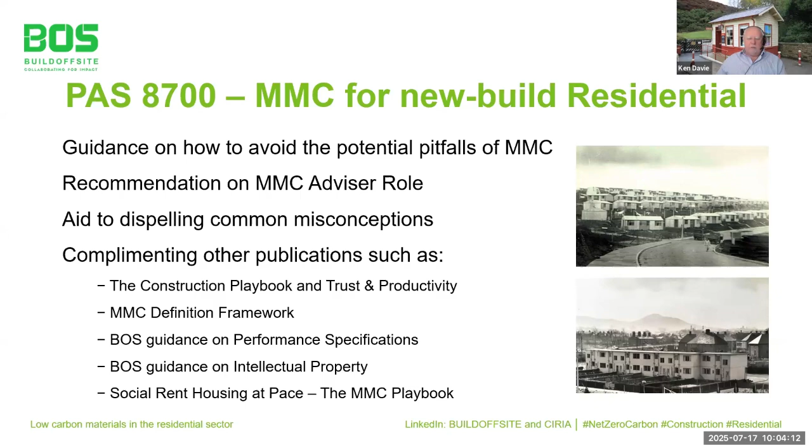And just a couple of little images to remind people that MMC, although it says modern methods of construction, both of these images actually relate to post-war. And when I say post-war, it's World War I, not World War II. One of the technical authors will be speaking at Offsite Expo in September about PAS. And at this point, I've said enough, and I'd like to hand over to our chair for the session, Dr. Kat Ibbotson. Thank you, Ken, and hello, everybody.

Welcome to this webinar. So what brings us here together today? This webinar series has been developed in collaboration with Build Offsite and CIRIA's Driving Net Zero Community of Practice to discover how the increased adoption of low carbon materials could support greener practices in the construction sector. We've done a fair few webinars so far which focus on low carbon and construction, all aimed to help the UK achieve net zero carbon emissions by 2050.

Now, the UK plans to deliver 1.5 million homes over the next 5 years as part of its mission to get Britain building again. Herein lies the opportunity, but also the risk, in terms of the opportunity to reduce carbon embedded in building homes at scale using low carbon materials. This webinar will explore how specifying cross-laminated timber, recycled steel, and low carbon concrete could pave the way as we move forward. Now, I'd like to introduce our speakers.

We have Patrick Usborne, the architect and founding director of Architects Perpendicular. We have Gwilym Still, director, Passive House and partner at Max Fordham. We have Steve Chesters, business unit director at Hadley Frame. We have Matthew Belcher, founder and CEO at Hempspan. Rory Bergin, partner, Sustainable Futures, HTA Architects. And joining our panel is Orlando Gibbons, who will be moderating for us, a senior engineer and embodied carbon specialist at Arup.

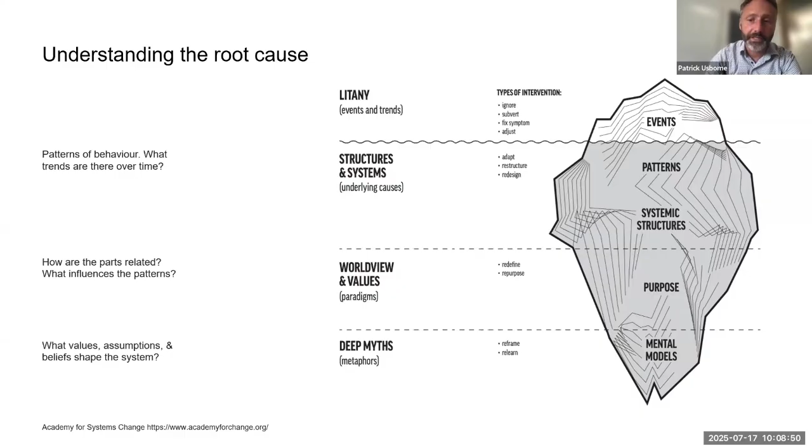To achieve lasting success, we need to go much deeper and reframe the mental beliefs which support the entire system above, to achieve a more holistic, sustainable, and inclusive design approach - shifting our economy to enable a systemic change.

One big thing is the need to shift the economies, which are very complex. It includes how we evaluate, how we educate, but also it starts with challenging how we define progress and its current measure, gross domestic product.

The third diagram is a graphic developed by an American planning consultant called Bill Reed, which really instigated the whole movement on regenerative design. Regenerative is a term used probably too often over the last couple of years, but it's actually very specific.

When we aim for sustainability from a systemic perspective, we're trying to strengthen the whole system for both people and planet, where we work in harmony to collectively regenerate ourselves and the environment around us.

Sustainability is first and foremost about systemic health in the environment and resilience at different scales, from local to regional to global. So it's moving beyond net carbon zero to get to a regenerative mindset, where we're all in unison together.

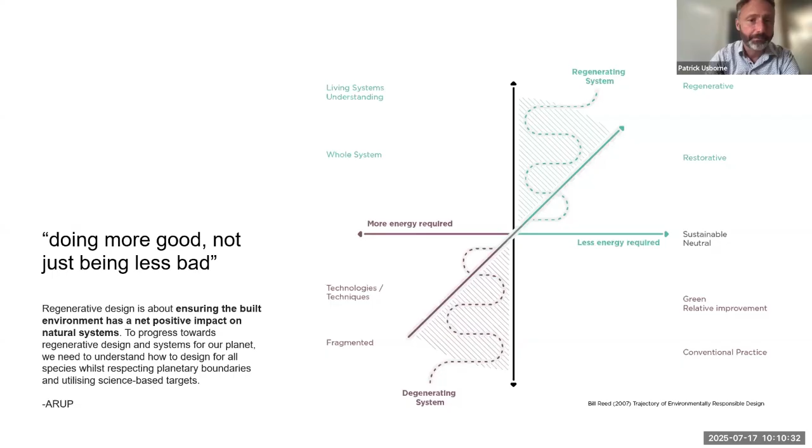In the manufactured cycle, products and materials are kept in circulation through processing like reuse, repair, and remanufacturing - so it's the way in which we build homes. Whereas the biological one is what we build with. Both are equally important.

I want to talk about two research projects we've been involved with. The first is a research competition called the Climate Smart Cities Challenge, which happened a couple of years ago, where Bristol was one of four cities which put themselves forward. It's a UN Habitat-backed competition.

We entered the competition through the Positive Collective, which is a collective we've set up, and we became finalists. We worked with others to try and combat a really big challenge Bristol has: to develop 24,000 new affordable homes by 2050.

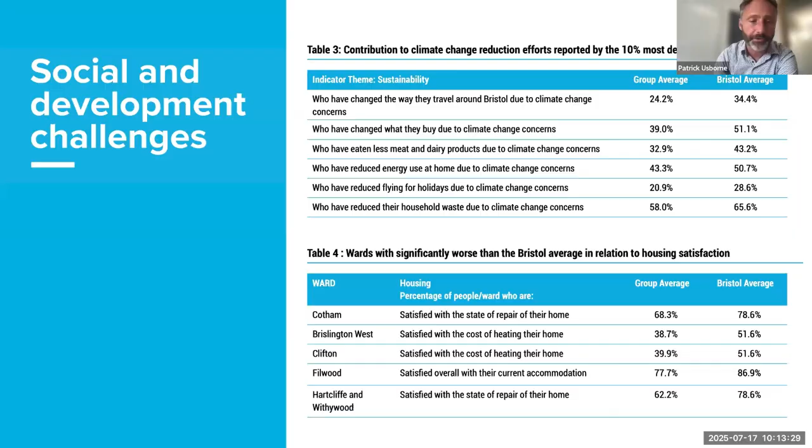So this research project was about how can we bring these people, these communities, and actually provide them agency, not just to create affordable homes, but also to bring them on board and help them to contribute to a more sustainable future, which is another world which we feel is possible.

So we created a platform which was called the Civic Exchange. We worked with various organizations: Igloo Regeneration, which was focusing on finance, Bristol Community Land Trust, We Can Make, and ourselves at the Positive Collective.

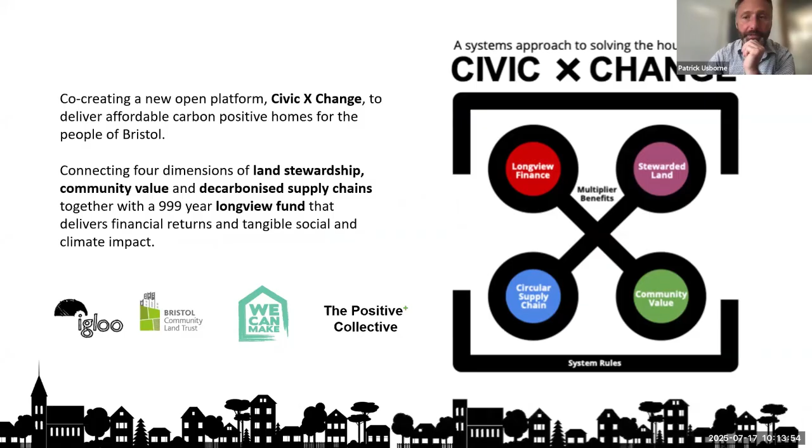And what we came up with was a 4-pronged approach for the Civic Exchange. One is to have stewarded land, focusing on and allocating mainly smaller urban infill sites held by the city, the church, or the NHS, on a long 125-year lease to encourage long-view stewardship and social value returns.

The second is community value, so looking at insetting rather than offsetting. Making sure that the value stays within the community, and the community living there can actually have agency and be part of the financial contributions of the profit.

This goes to the third one, which is long view finance. So bringing a blended green finance model in, having pension funds and other providers, but also those people living there can buy into the fund rather than buying their individual house.

And then lastly, a decarbonised supply chain. So for example, we...

We focused on a small area of Bristol, and what the Civic Exchange allows is to map all of the houses which are both needing to be retrofitted and providing support through the council to enable that to happen, but also all of the houses which could be better fitted.

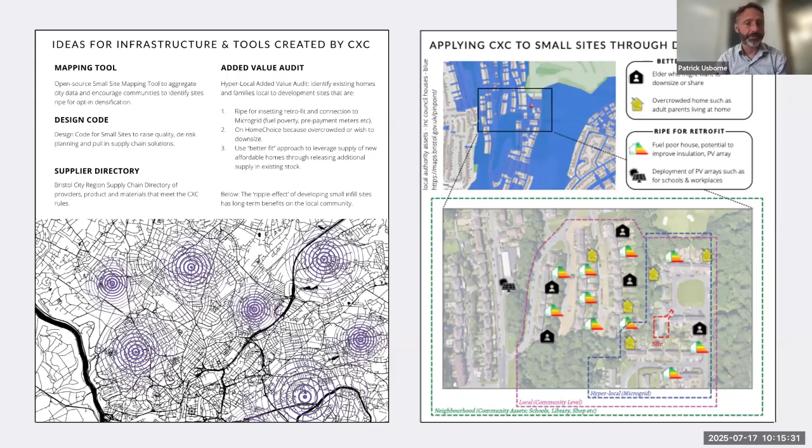And that's where residents might be bursting at the seams and need a bigger house, and where the next door neighbour might be rattling around in their house and need a smaller house. So locally trying to swap people around on a very localised level to achieve a better fit.

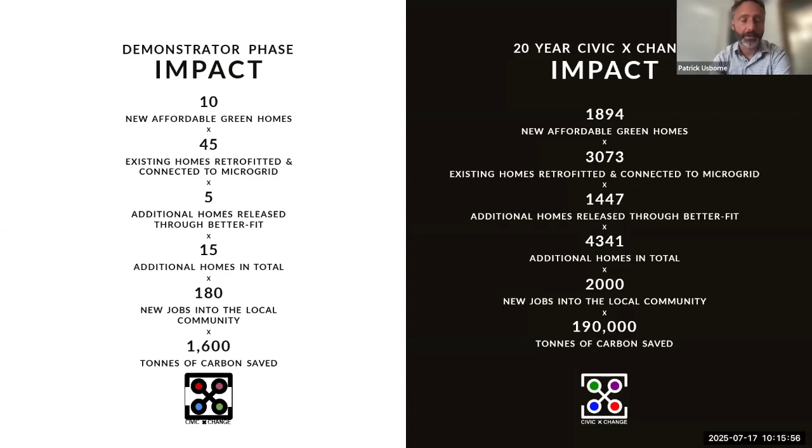This was a demonstrator project, and we felt the multiplier was quite significant, because if you're both retrofitting to be more sustainable and also better fitting, that deals with the vast majority of the housing needs in its own right. And then identifying all of the local pockets of land to build sustainable homes in.

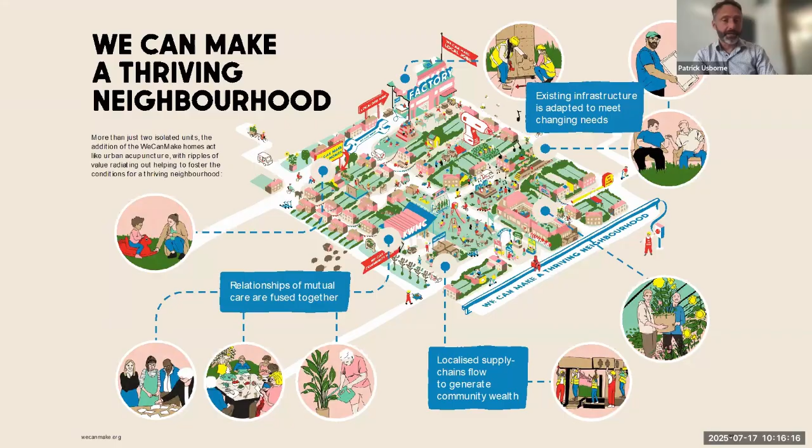So this was all about working with the local community. We Can Make has been doing this at the moment, and they've set up a workshop called the Knowle West Media Centre. I've got a video which I'll start to play, just a short amount, to explain how it works.

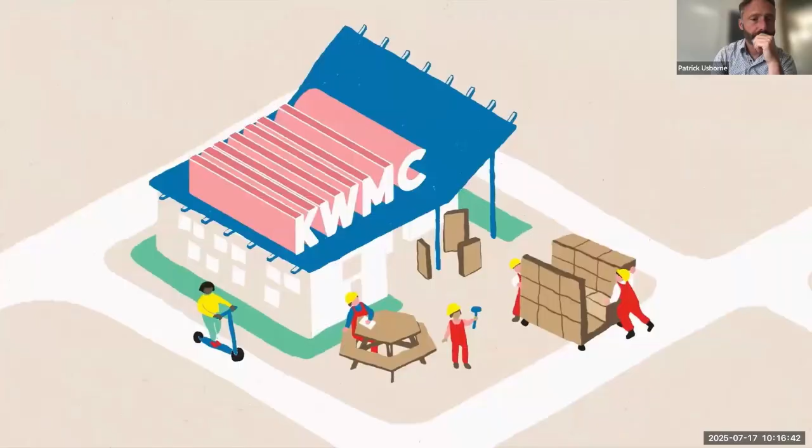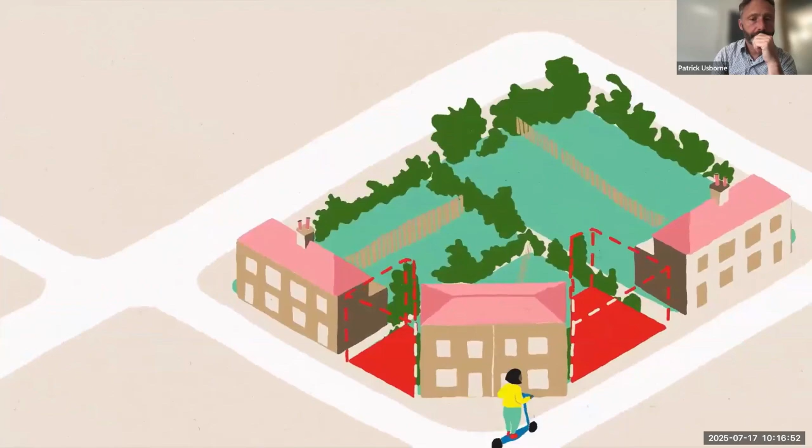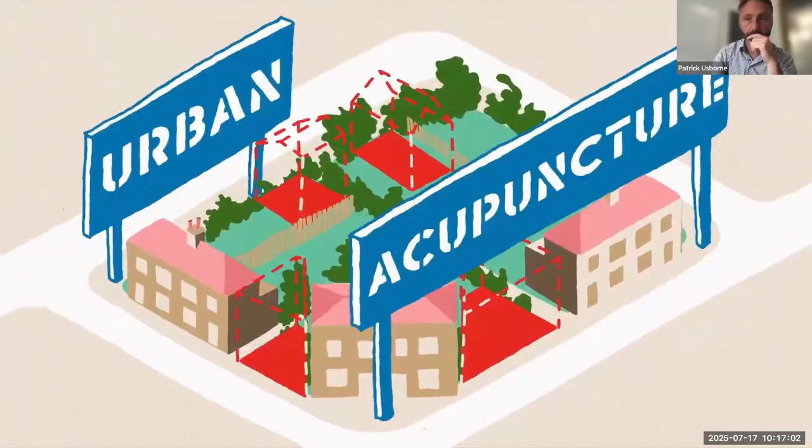Buying a house is more unaffordable than ever, and council house waiting lists are the longest they've ever been. Is there another way? Yes! In Knowle West Bristol, we've been creating a new community-led way to unlock microsites for people in housing need. In low-density neighbourhoods like ours, there are often spaces hidden between buildings and in large back gardens where new homes could be added. We call this gentle densification, urban acupuncture. We think it's an approach that other communities could adapt and adopt for their own context.

So, how does it work? First, start with people. A family might be experiencing overcrowding. An elder might want to downsize but stay in their community. It's an opt-in process. It gives local people a choice to use land that is already in their hands to improve their own housing situation and make a difference to their local community.

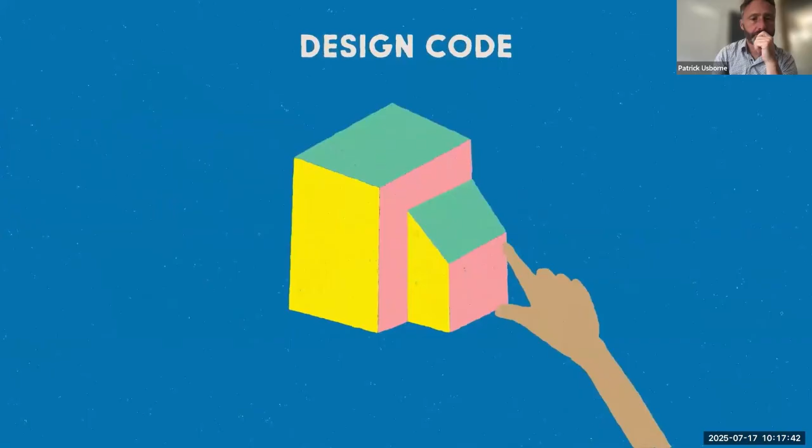Second, ensure the community sets the rules. A design code empowers the community to help set the rules for what gets built, ensuring new homes are high quality and add character to the neighbourhood.

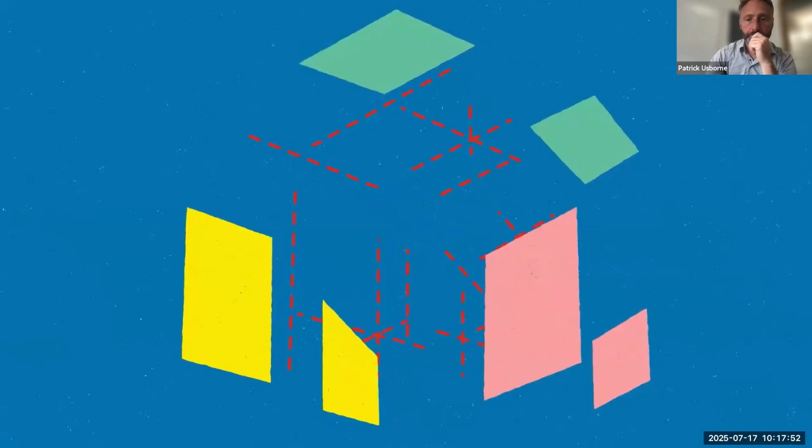The result? It's simpler for people to navigate what can be a complicated design and development process. And when it comes to getting planning permission, the answer is more likely to be a yes.

3. Build for community well-being. When a family opts in, we work with the local council to transfer the microsite to our Community Land Trust. Transfer is conditional on the microsite and home staying in community ownership and fixing the rent at living rent, no more than 1/3 of local household average income. Income is reinvested in making more community-led homes and infrastructure, creating more long-term community benefits.

4. Make the homes locally. It can be tricky to build on microsites because space and access are often tight. To get around this, we use a modular construction system made up of small wooden blocks that fit together a bit like Lego. Using wood means the homes are low carbon and better for the planet.

The parts are digitally designed, cut, and assembled in our community workshop. Making the homes locally creates jobs and grows new skills, helping to build community wealth. It also means the community has the know-how to maintain, repair and adapt the homes, helping to meet changing needs over time. Unlocking microsites in this way creates a new way for people and communities to make the homes they need, and in the process unlocks a new way to help make a thriving neighbourhood.

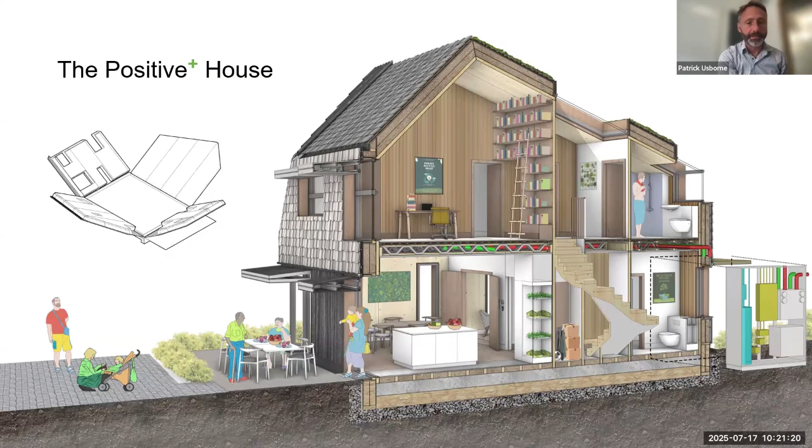So what our approach was: identifying, firstly, in terms of material, there's a really big issue in the fact that we don't have enough timber in the UK. We're actually the second largest importer after China. But there's real opportunity to be able to grow more. And I know across all governments, there's real need to bring that up from 13%, where we currently are, to more of a European average, using low grade agricultural land.

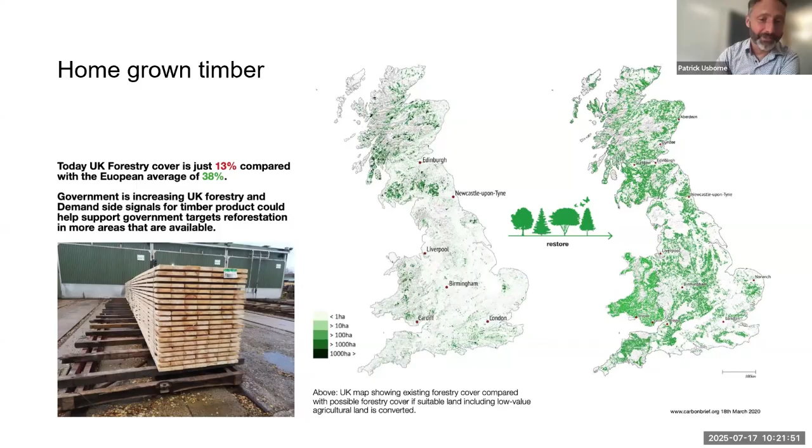This is all ideal. It takes time to grow timber. But the other part of it is making the most out of what we've got. So we did a research project where we identified, through using a fully grown Sitka spruce, we can create a typical 2-up, 2-down home from a single tree, which we called a tree for a house.

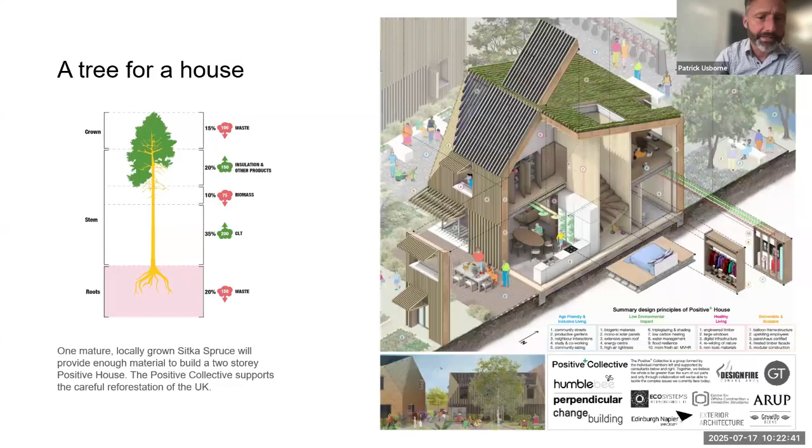So it was working with others, a few companies down there on the lower right, to identify which parts of the tree are best used for which elements of the home. Obviously, the main trunk for the CLT, the brash for some of the wood fibre insulation, and some of the external cladding as well. So we identified we can produce a home, and I think it's trying to get over the perception that it's okay to use a fully grown tree once it's been able to sequester as much carbon during its lifetime as possible.

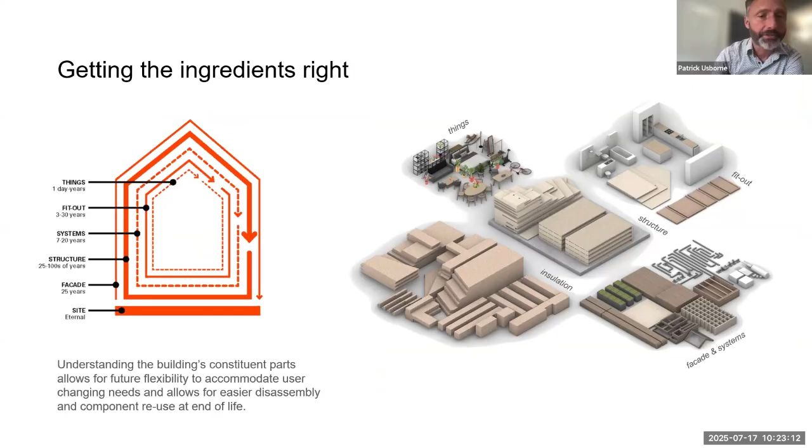And also identifying the different elements of the home and the longevity of those elements, to enable that during the design process, right from the beginning, we understand how we can disassemble, we can remove elements which have reached the end of their current life, to be able to then replace with updated elements, and then obviously what to do with those elements after their use to enhance them rather than to automatically recycle them.

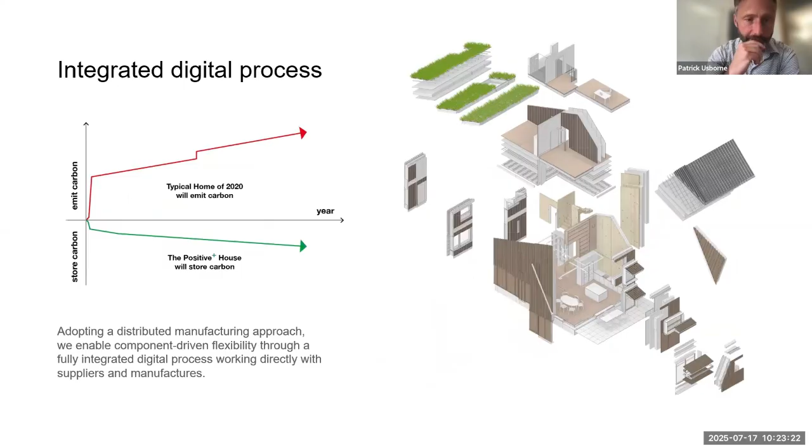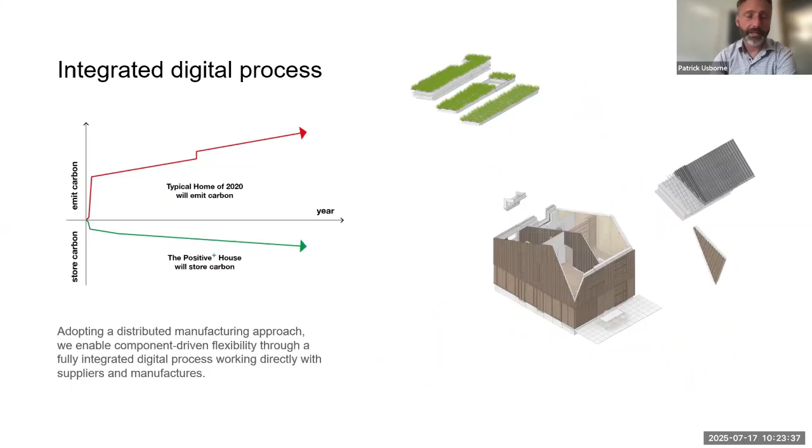So this is very much a digital process that we did, and it was based on a distributed manufacturing process where we're identifying the existing supply chain across the UK, bringing that knowledge in to create a flying or a field factory where the components can be assembled locally on site and then delivered to their final place.

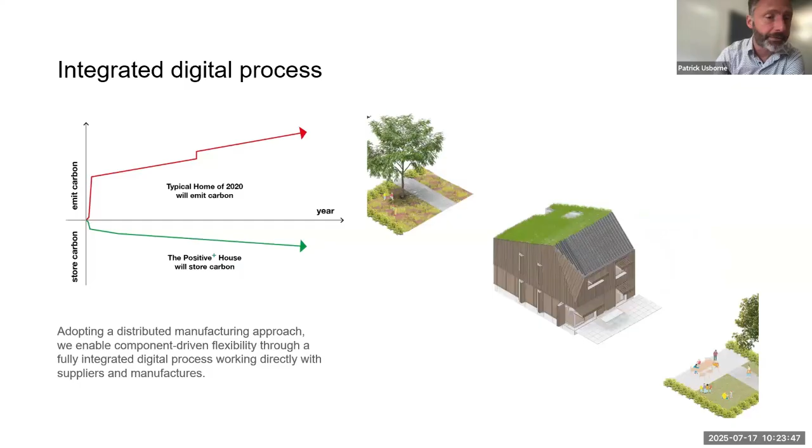And through our research, we found if you include sequestered carbon, which is a really important factor, that actually our homes are carbon positive, and we've got some statistics behind that as well.

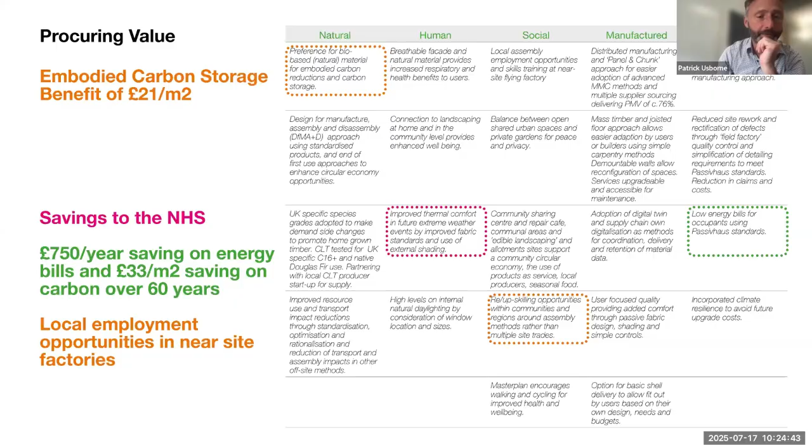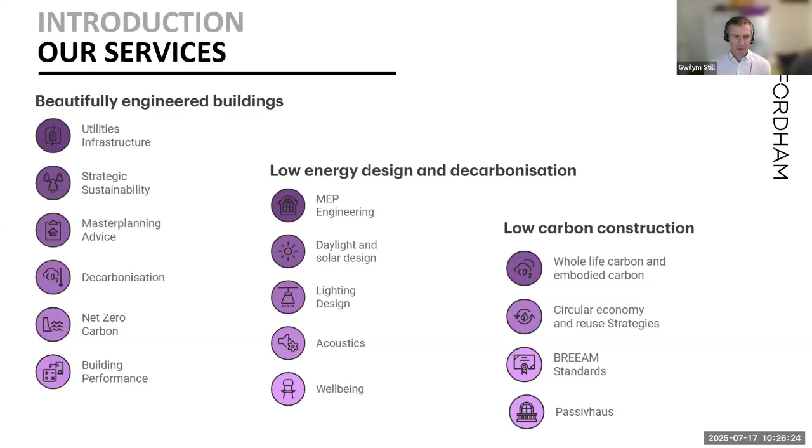Just for background, these are the range of different things we do. So whilst we do lots of MEP etc., and have done that on some of these projects, I'm mostly talking from the experience we've had doing the kind of Passivhaus and embodied carbon work on them. This is principally going to be coming from 4 different completed or on-site projects we've got.

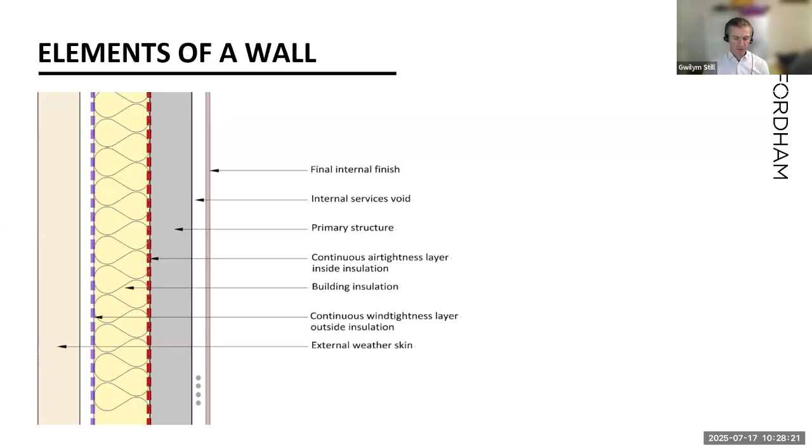So when we've used CLT on projects, it's quite interesting at that point, because on this conceptual diagram, it's then doing normally 2 or 3 of those jobs. So it's getting you quite a lot of what you want from the build-up, but it's not getting everything.

We've generally used the CLT as the airtight line on the project, and we'll chat about that in a minute. It's acting obviously as the primary structure, and it's also working as part of the thermal build-up as well. It's got a conductivity roughly 4 times worse than the mineral wool that normally sits outside it, but nowhere near as bad as concrete or metal frame or something like that would be. So typically for each 100 mil or so of the CLT, you're getting the same amount of insulation performance as you would with 25 mil of the mineral wool on the outside.

This does have an interesting interplay with the MMC side of stuff, in that there's a chunk of prefab that happens with this, and the CLT comes to site with a lot of the builder's work formed in it and goes up quickly. But there is still those final layers to be formed, which are then happening in general on site.

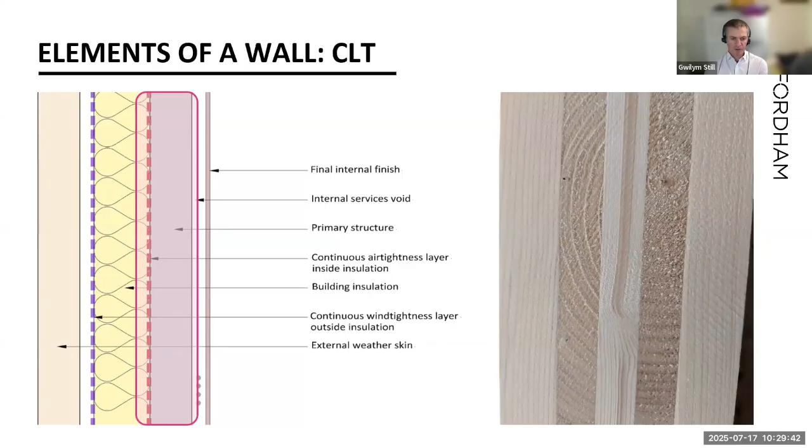Air tightness is a really important topic for buildings, both for helping to reduce operational energy use, but also helping with occupant comfort, avoiding cold drafts, and helping with fabric protection for longevity by avoiding the risk of warm air leaking out, condensing within the build-up.

Our general experience with that has been that you can view getting really good levels of air tightness as something like a chain. No individual element of it is very complex, but all of those links need to be strong and well forged, otherwise the chain fails.

And that goes from right at the start of the project, setting a really good air tightness target, picking the overall strategy, working that strategy through within the design, then going through into the final detailing pre-construction, and having a really strong quality control process through construction.

So that what's down on paper works in practice, and that it gets tested at a point where it's easy to check the work's been done well and to make any remedial work as well without it being really painful, which CLT has generally lent itself to quite well.

What you can see in the photo here is a couple of sections from one of our projects. So on the left-hand side, you can see the different lamella. This was using a 5-ply CLT build-up. And on the right-hand side, you can see part of the reason for having that 5-ply approach. So you can get some cracking within the lamella.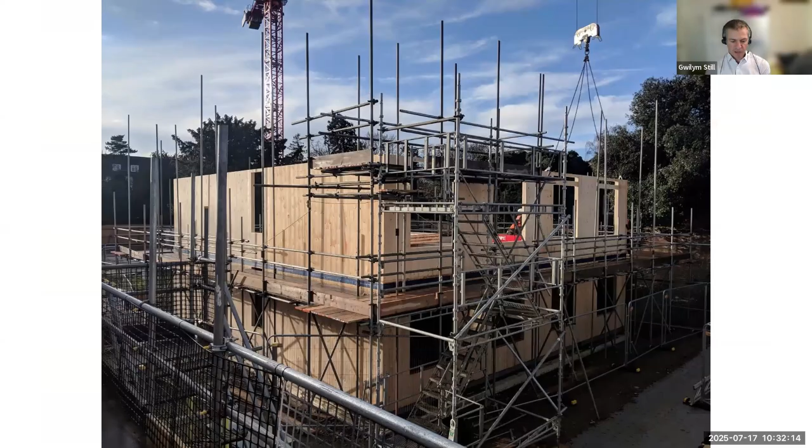And we've then followed that through so that when you get to some of the detailing that I'll show on the next slide, you're careful to avoid any cracks in that last lamella, kind of undoing all the good work you've done at the junctions. So this is from a project going up on site. It's nice, it's going up really quickly, which is good.

We've generally had then, so the strategy has been to use the CLT as the airtight line, and to then have windows and doors sat on it, which are to a really good spec, and the interface is carefully detailed.

They've been interesting from our point of view, I guess, because there's some standard practice things in that everybody tapes the junctions between the CLT as a matter of practice anyway to protect against moisture. So all we've needed to do to achieve really good levels of air tightness is to be careful with the detailing and change the spec of that tape and not introduce lots of additional products.

On these schemes as well, we've generally used the CLT as the thing that supports the windows, not because it was much better thermally than alternatives, but because then it helped to limit the number of trades and keep things simple and fairly speedy on site.

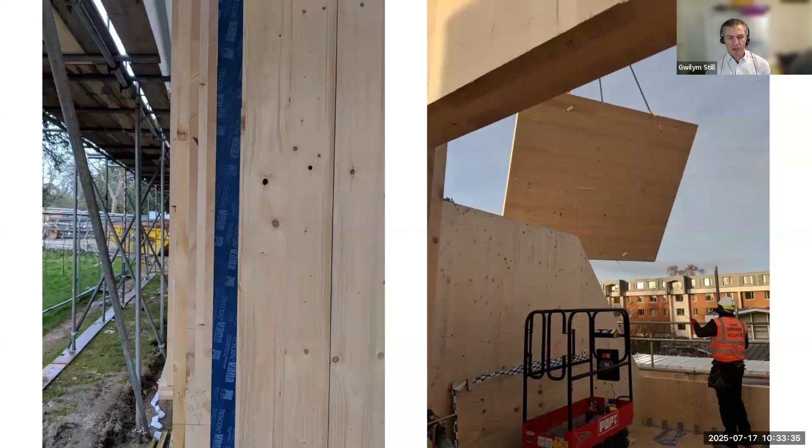The next image shows a couple of the slightly more fiddly details that you can end up with. So on the left-hand side, you can see where we've got an end grain of one panel butting up against the next panel at the corner of the building. This is showing the initial taping, and you can see the tape is sort of just lapping over the joint between the two, but not going particularly far beyond on either side.

From our point of view, that creates an air tightness risk then, because some of those cracks between the lamella could effectively bypass all of the tape and come right to the edge. So where those details do exist, we've ended up with the tape lapping right the way over the end grain. And normally that end grain, at least for intermediate floors, has a sealant applied to it, and that's still been kept. And then we've had a compatibility check done to make sure that the tapes that are doing the air tightness side of things can work really well.

The image on the right-hand side is from a panel being moved into place. So you can see both the nice side, that it's some pretty big chunks of structure moving around fairly quickly. Then there's the follow on that actually the thing that's holding it up and letting it be moved around is some lifting holes or lifting eyes in it. And so that gives an extra detail to be dealt with. So this needed to be run through and made to work from both an air tightness and a fire and acoustics point of view.

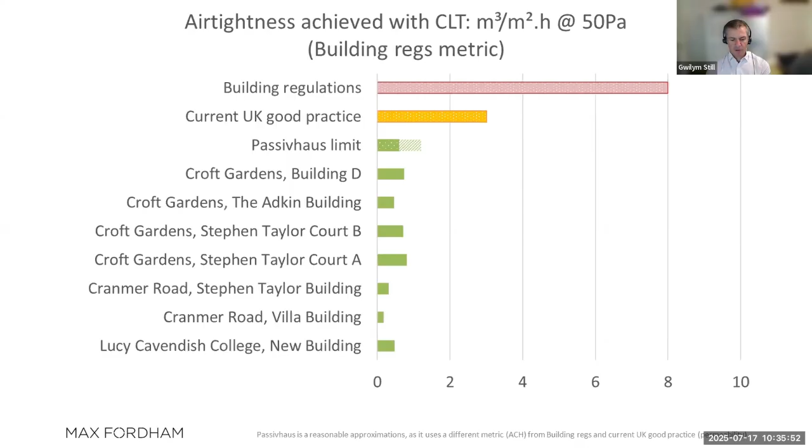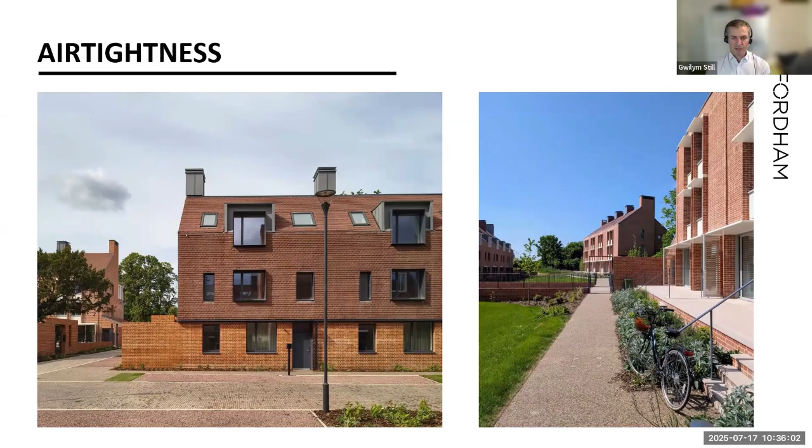And more recently, they've been far enough below that limit that actually we've been relying on a better level of performance. So for Hinsley Lane that you can see here, we've worked to a better than Passivhaus level of air tightness and used that to mean we don't need quite as much insulation in the wall build-ups.

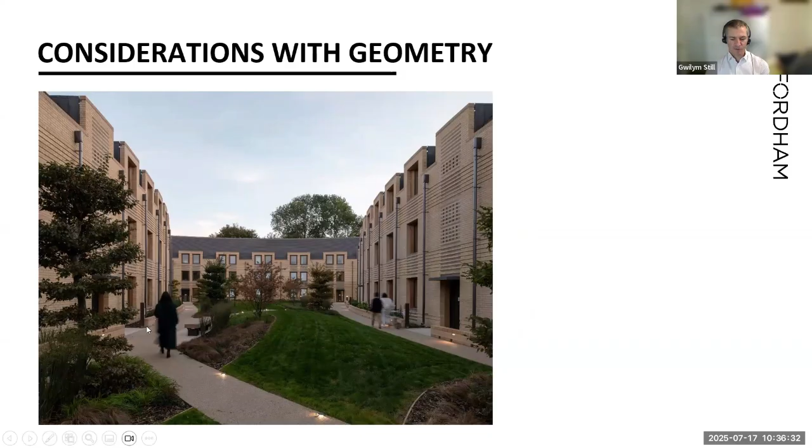A point just to flag is you can get some interesting bits with geometry on these. So on Croft Gardens, you can see we've got curved buildings, but the primary structure behind is planar. So there's some fun and games to take out the difference between that curved external line and the primary structure behind the scenes within the cavity. And I think the structural engineer had fun with the roof detailing to make that all work.

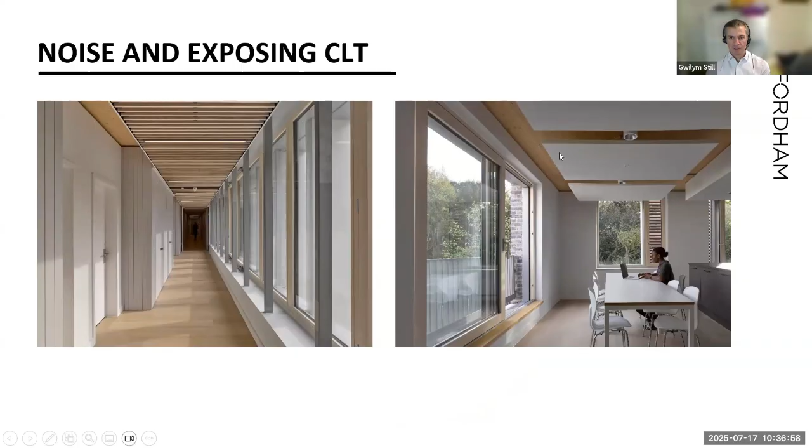From the noise side of things, I think timber's lovely. Having it exposed is great, but often acoustics trumps that and it gets quite tricky with flanking details and so on. Here's a couple of examples where it has been achieved. So you can see little bits from this corridor of this project. It's at Cranmer Road in Cambridge. And then within some kitchens, there's exposed CLT, but it's then complemented with these acoustic baffles. And I think you can get really nice rooms and experiences with this, but you can also deliver really lovely spaces with, say, exposed timber in the flooring and the furniture instead.

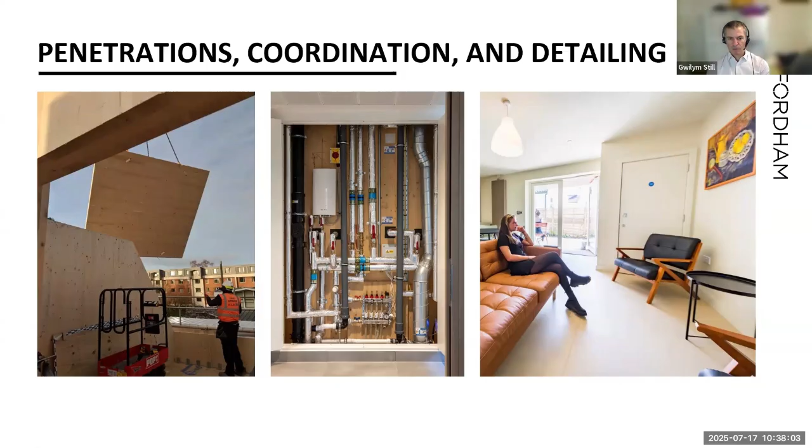And the right hand side is from the timber frame Bluebird project, where the cupboard you can see houses the MVHR unit on the thermal line, but there were some coordination issues that came up late in design, just to make sure that what was detailed actually worked, because some of what got delivered to site was a little bit different from the design initially.

I think similar to what Patrick's talked about, we've looked at it from the embodied carbon point of view. I think there's some interesting bits to be careful of with those. So the upfront carbon of the timber frame projects have generally been better than the CLT. You can see some sort of crossover during construction if you include the sequestration side of things, which often then gets slightly unwound at the end, depending on what the assumptions are for end of use.

But I think, and this is an idea that I'd heard from other people, not one of my own, this idea that you have to be really careful, because any metric that tells you it's better to build one house with 2 trees rather than 2 houses with 1 tree must be sending us down the wrong routes. And we've seen some people, I think, on other projects try to put a bit more timber in to count the sequestration and sort of offset a bit of extra metal somewhere else, which always seems a bit perverse.

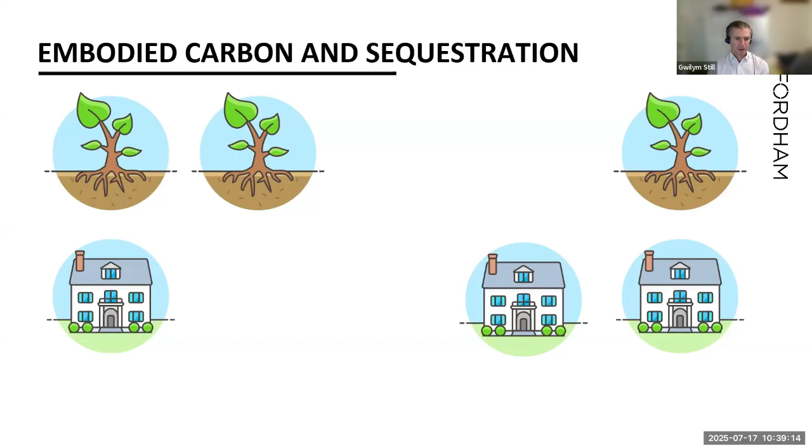And then very briefly on the kind of thermal performance and detailing side of things, we've seen the CLT then help and contribute with a few other things. So this is from the Croft Gardens project. This is where the substructure meets the wall. You can see the CLT here. That's actually ended up meaning we could have a thinner than otherwise concrete slab. There's a bit of saving in the concrete there, and then we've been able to wrap the insulation around that entirely. So we've got really good thermal performance and limited thermal bridging.

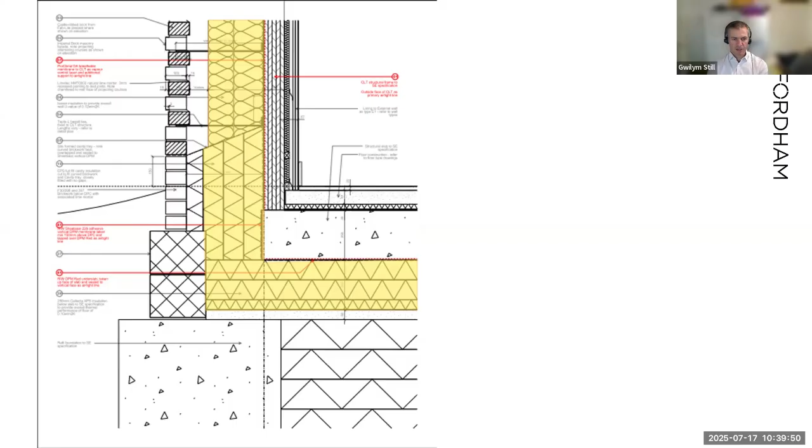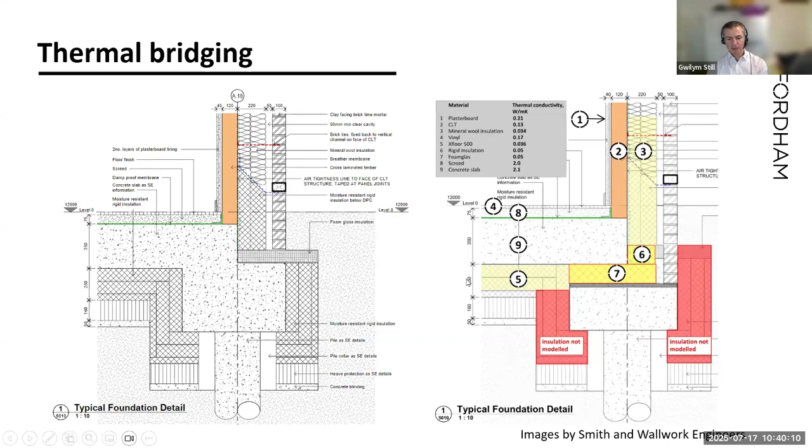That isn't always possible. So this is from another project. Smith and Wallwork were the structural engineers on it. The CLT is dropping down here. You can see the kind of default solution with a convoluted thermal line and then some redesign. So touching on the CLT, but also other bits to make the detailing simpler and effectively use some concrete piers to do that coupling up, which then ends up meaning it was thermally better, easier to build, cheaper, and we took out some insulation from beneath the slab as well.

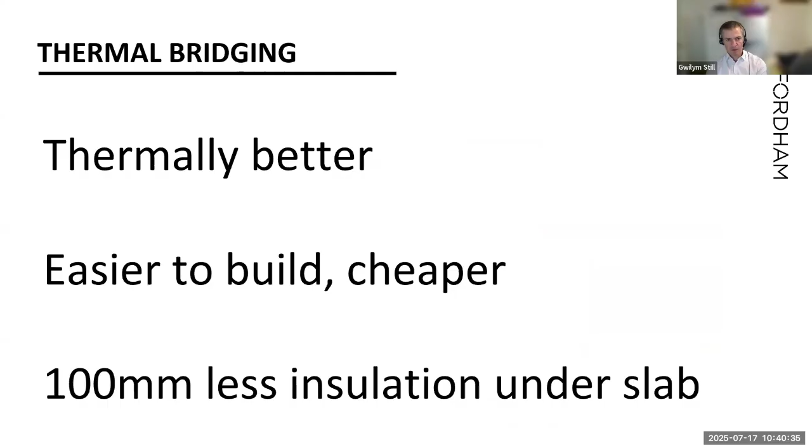So we've talked about there a couple of different examples of bits where we've tied through CLT to helping with both low embodied carbon and also some knock-on impacts from them. But as Ben Goldacre said, it's a bit more complicated than that. So here's one list of a lot of different primary structure considerations that come up on projects. I don't think there is a single solution that wins on all of these different measures. So like with many design decisions, it's driven by a balancing act of picking what's best for that particular project. But at least it's good to go through that process quite thoroughly and make sure that everything's being considered and there's a deliberate choice.

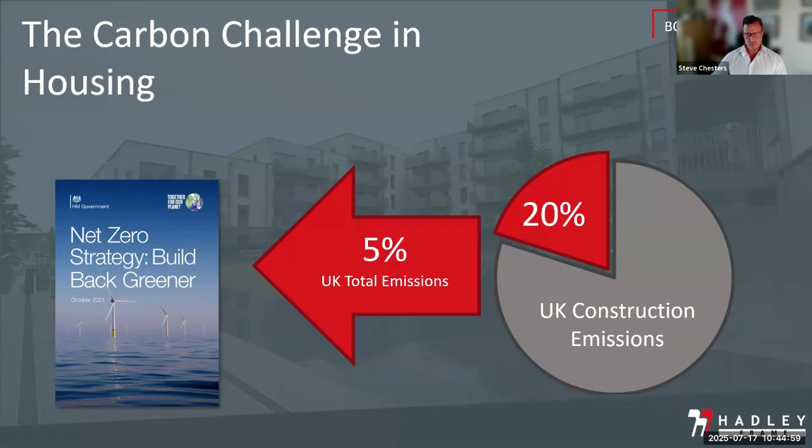So looking at light gauge steel systems specifically, like the ones we provide through Hadley Frame, they can offer a real option that can be an important contribution to the overall solution for the industry. The first thing is the strength to weight ratio of cold rolled steel is very high, which means they're very strong, but they're very light.

So this has an impact on the actual volume of material that's being used and the mass of the structure itself, which then has a follow-on impact with what you're doing in the ground. So what type of foundations you're using, how much you're using in those foundations, how deep they are. It's also generating less site waste from that as well. The systems are manufactured off-site, so we get faster builds. We're using tighter tolerances, and we're less affected by weather delays as well.

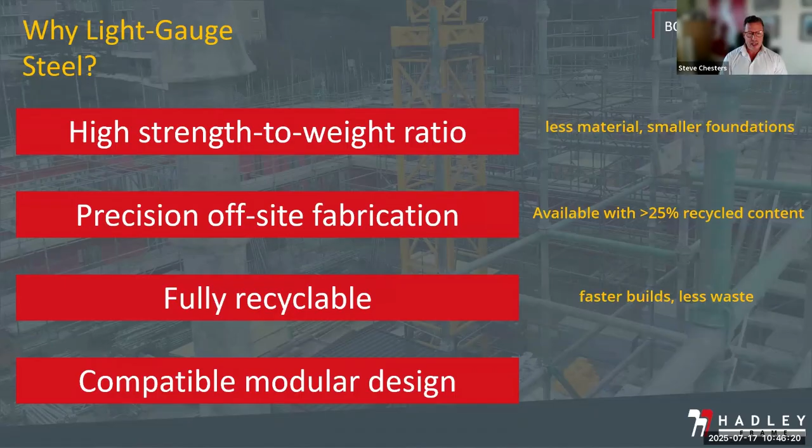Crucially, they're fully recyclable. Every piece of steel in the panels can be recycled or reused endlessly. When you're building homes and you're looking to meet program targets as well as carbon targets, this is ticking both boxes.

So a quick example, there was a study by Delgado and Herrera in 2023, and they were comparing light gauge steel framing to a concrete and masonry structure. And they found that the steel solution had 33% less embodied CO2 per square metre, and the walls alone were 50% lower in carbon. What was driving this?

Well, mostly it's the mass. There's far less mass involved in the steel structure. There's no cement, and the logistics involved were far lighter than they were in the traditional build. Even compared to hot rolled steel, cold rolled steel avoids a lot of the energy intensive process from the creation of the product.

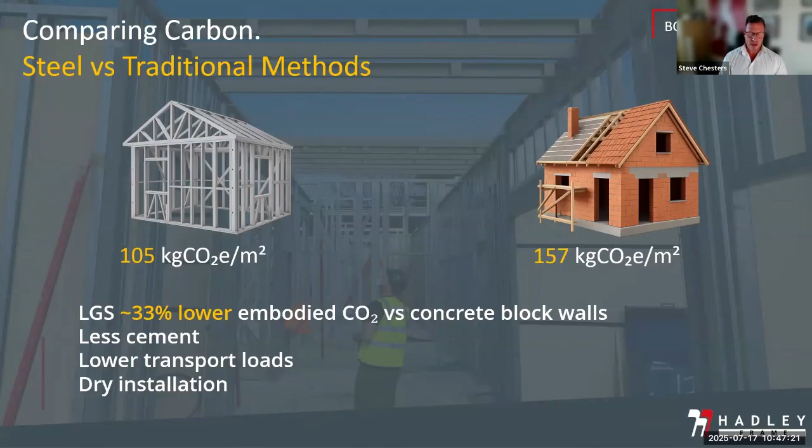Steel's recyclability really is unmatched. It doesn't degrade. Over 90% of steel in UK buildings is either recovered or reused and recycled. There is very little that goes to landfill, and there's some statistics that have shown higher percentages than that.

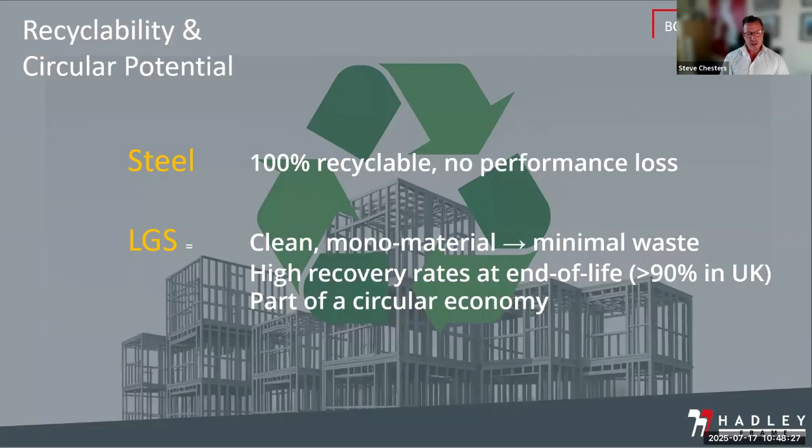Light gauge steel is really very useful within this recycling area because it's clean, it's very consistent in its structure, and it's a mono material. There's no glue, there's no filler, there's no composites that are complicating the recovery of the product itself. So scrap steel has value, and it's an important part of that circular economy that's already existing and already thriving, and it's one that just needs to be expanded more in order to reduce the carbon that's going into the structures.

So recycling is really important, but it's not all about recycling. There's a really good document that was recently written by IStructE and the BCSA. One of our chartered engineers, Stephen Hall, recommended that I review it when we were talking about this subject. And I can't recommend it highly enough. I'm going to point to it again in another slide later on. It's very interesting. There's a lot of good insights into the engineering and where they think we should be going.

But one of the things it's strongly emphasizing is design for reuse. And building residential structures or more commercial structures, if we're building them from demountable panels, and using components that are bolted rather than welded, and designing them to be literally taken apart and reused, then it's going to be an enormous benefit to what we're doing in the future.

And modular, again, we produce modular structures, and modular supports this as well. You could be producing a modular structure that's designed as maybe a temporary classroom or a temporary health unit, and that can literally be reused in its own form for maybe accommodation for homeless people, or a housing extension, or restripped, or even a site accommodation. We sometimes use structures for it again now. So these are where light gauge steel framing and modular systems really come into their own.

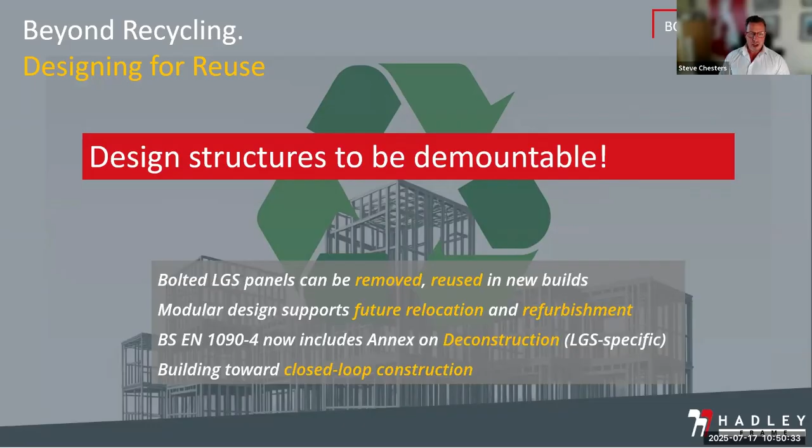Also, the new BS EN 1090-4, that standard now includes a deconstruction annex, and it's a clear signal that reuse is now being taken seriously within structural design.

So just to touch on green steel, it's a real buzzword in our industry at the moment, in the steel industry. It's quite complicated. It's not as straightforward as one product achieving everything that's desired out there. There's different routes to green steel, and there's different values behind that.

We could easily do a full presentation on green steel in itself, but just to try and clarify it a little bit in broader terms, some green steel is green because it's made from scrap material and it's produced in electric arc furnaces, as opposed to the far more common blast furnaces.

There's also an option for using hydrogen instead of coking coal to reduce the iron ore content used within the blast furnace manufacturing of steel. And then there's another route to green steel which is really an offset accounting method, where steel is produced with a carbon content, and they might allocate a higher carbon content to half of that batch so that you can allocate a lower carbon content to the other half and rebrand that as a green option.

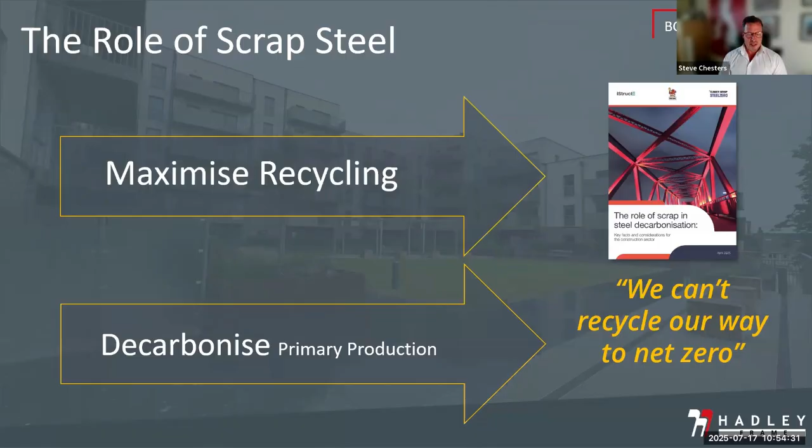So that means we need to look at the design, understanding our design. This is down to designers and clients alike - they both need to be supporting both sides of this, which is minimizing the steel, minimizing the specification, and specifying low carbon sources wherever possible. And then as manufacturers and constructors, we need to be looking at keeping those designs as lean as we possibly can.

To be fair to government agencies and departments, policy is catching up fast. The proposed Part Z regulation makes whole life carbon assessments mandatory, and we're expecting there'll be limits to follow this as well. We're seeing procurement shifting - some contracts we're bidding for are now scoring the carbon tender in the evaluations. The London Plan is already demanding carbon assessments, and we expect that will follow in more cities.

Timber's getting a big policy push too with this, and I say this as someone within the steel industry, because there's room for all solutions. Anything that's good for the environment or good for the economy is going to be good for the industry, and that's really what we're supporting. But steel does have its strengths in durability, fire resistance, and in its mid-rise capacity that timber can't achieve. So we need balanced solutions for low carbon steel and the industry in general.

So as I said, we need to be smart. We've got a choice to make at this juncture: keep building the old way, or adapt and look at new, smarter ways of building in the future, so we're not just relying on recycling content. Light gauge steel gives us a better chance to build better, faster, and greener. We can be certain regulations are going to get tougher, buyers are going to expect carbon data, and planning teams are going to want to look at life cycle thinking.

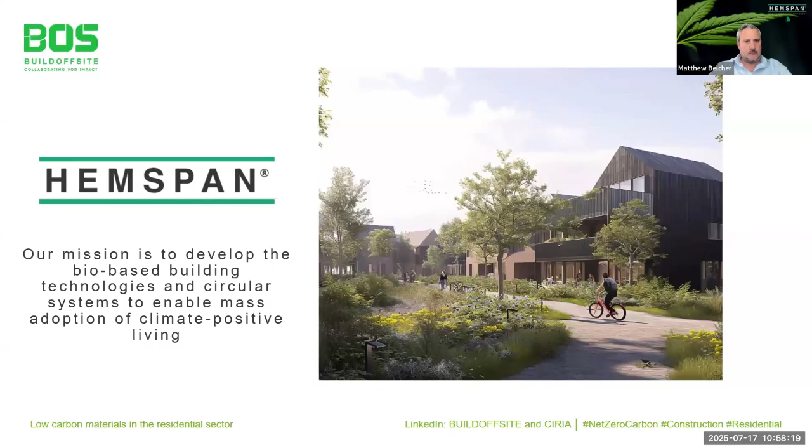We like to express the challenge that we face in construction and infrastructure across the globe, that nearly 40% of global carbon emissions are a result of the impact of humans and the built environment. We also focus on the very worst of house building in the UK, where the basic minimum requirements for building standards can leave us with homes that have whole life cycle embodied carbon emissions at 1 to 1.5 tons for every square meter of new space delivered, and we don't think that's good enough.

And you know, the RIBA 2030 target, which lots of people who've joined this will understand, is at 0.63, which would be an amazing outcome, but it doesn't go as far as we think it should.

And because we're a construction technology business, it allows us to focus on a core component, which is industrial hemp. The reason why industrial hemp is our focus is all about biomass yields and carbon sequestration. Structural timber is a key dynamic for what we do, and as we go forward, we are looking to displace timber elements with composite elements that we are developing in parallel through our R&D programs.

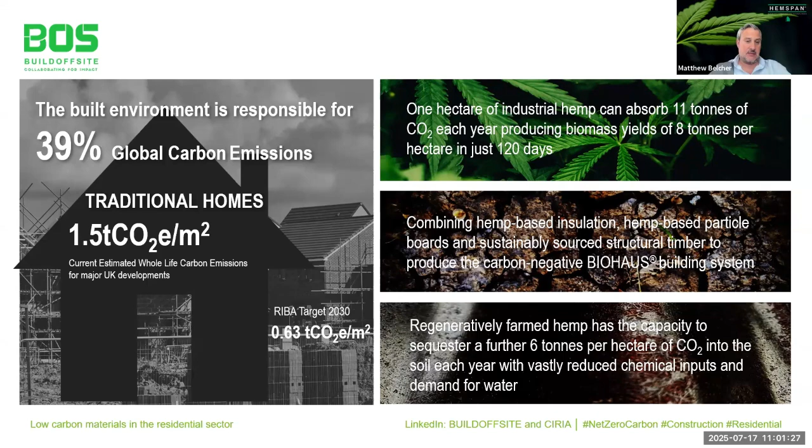Depending on how the crop is farmed, there's a lot of potential to sequester further carbon into the soil, which we absolutely don't count in any of our analysis or carbon equations. But in partnership with farmers that we're connected to, we're looking to establish robust farming systems for large-scale adoption of industrial hemp.

So Hempspan has developed a Category 2 MMC system, closed panel. It's a Larsen Truss timber frame system, and the system is called BIOHAUS. We're very proud of what we've developed, and we're also very proud of our trademark.

Essentially, when we say climate positive, we're talking about the plots themselves. We are not talking about site-wide infrastructure; that is not something we can currently control. But we're essentially saying that at practical completion, we're locking up more carbon in the materials than is emitted in the manufacturing and construction phase, and that we're delivering homes with our development and design partners that produce as much energy as they need over a calendar year, albeit with the obvious export-import balance through winter and summer.

So the BIOHAUS system is fully developed. We were lucky enough to achieve BOPAS accreditation at the beginning of last summer, and we're working also with ICW for warranty and their advanced assurance program. All of our carbon data has been verified through 8Versa, who are a carbon consultancy. Whilst the performance of what we've developed could achieve Passive House accreditation, we're more focused on presenting a climate positive program with 8Versa and their natural carbon solutions program.

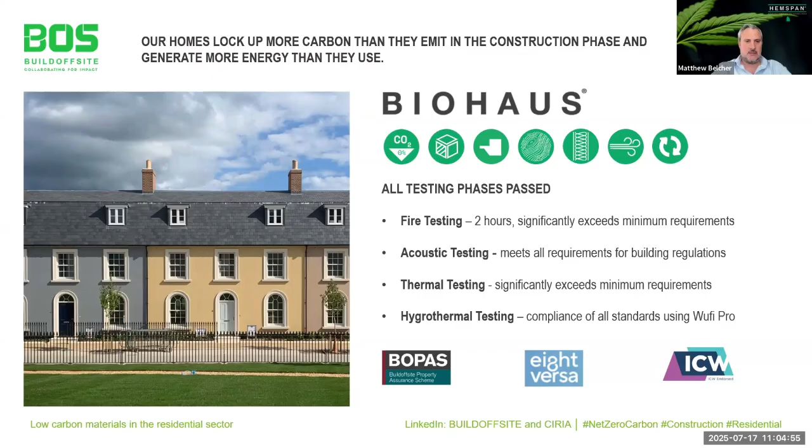What's really important is, and the image on the left is showing you that our system is facade agnostic, which is a phrase I like to use. So where the BIOHAUS system is deployed, we don't require architects to specify timber cladding or hemp cladding or anything else. We want the BIOHAUS system to be a go-to superstructure technology for architects and developers across the UK.

In terms of key benefits and what we do when we design, at this stage, in order to prove our technology, we are set up as a design and build contractor, whilst we move into in-house manufacturing next year. When we design, we look to onboard all existing and best-in-class renewable technologies.

The BIOHAUS system in its raw form is effectively carbon negative in construction, providing we can account for biogenic carbon. And as I've already said, we're delivering homes that will produce more energy than they need across the calendar year, and that's not just regulated energy, that's unregulated energy as well.

We've taken passive house principles in our work. We're delivering structures that will have an air tightness below 0.6 or below. The aggregate U value of our system between roof cassettes, external walls, and foundations is targeted at 0.1, which is at the sharp end of thermal performance.

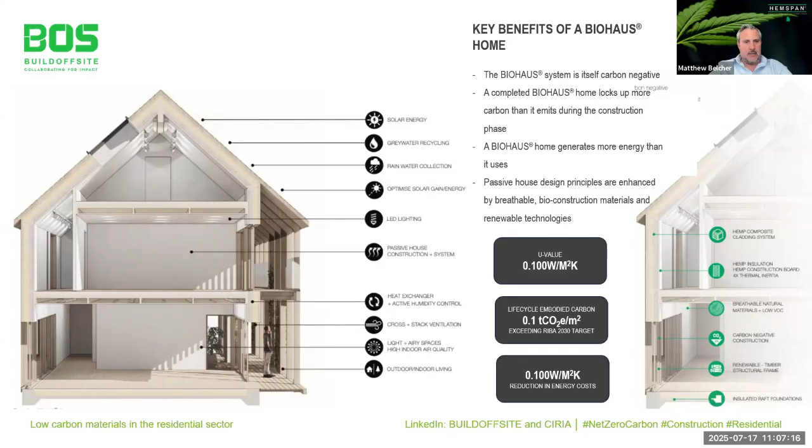We've got an inner load-bearing stud that's carrying all the structural vertical loads, and that is strapped to an external stud, which is much smaller, carrying wind load and cladding load. It's effectively cantilevered off the internal stud. By having this Larsen truss design, we're able to maintain an almost continuous insulated core through the panel, through corners and all the details.

Roof cassettes are effectively a posi rafter structural design with a full fill of hemp fiber insulation. And we have two layers of our hemp particle board called bioboard on the inside face of the roof structure, the roof cassettes, before a final plasterboard finish.

Same principle is in the external wall build-up, where we've got a full fill of hemp fibre insulation at just shy of 300 mil. And then there's an OSB racking board either side of the studs, and then again two layers of our bioboard product.

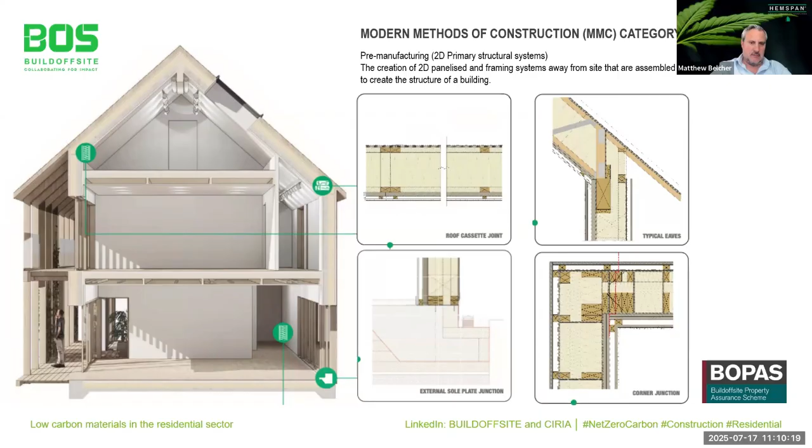We are currently on site with one of the UK's most prominent landowners. We will be putting out some news around this in the coming months. This is effectively the first deployment of the BIOHAUS system and our case study project. Our life cycle embodied carbon stat for this house, based on the full fit out specification, was 142 kilos.

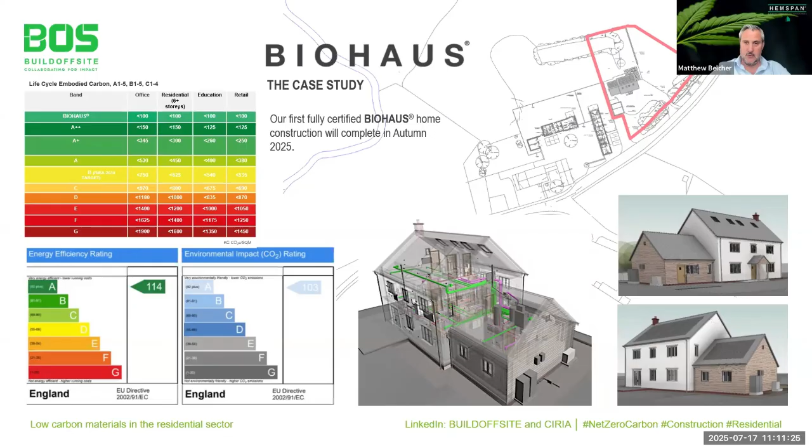As I'm showing in this chart above, we expect to go below 100 kilos once we're in vertically integrated production. Predicted EPCs on this project are 114%, and we're really excited about this. We have had a conversation with Octopus about their zero bills for this, and it's obviously quite unusual for them to have a house that's only got solar on one elevation to meet their test.

We are just going to put up a poll. Thought it was important to share what we do first. What do you believe is the most important factor in delivering truly sustainable housing at scale? There are four options: use of carbon negative materials like hemp, local job creation and community benefit, speed and efficiency through MMC, and I think everyone's favorite, planning policy.

So I'll let that rumble on while I finish off.

We are involved in land promotion, where we partner with landowners specifically, and we're promoting a very large site in South Essex for 2,000 homes, which is a unique opportunity because the landowner was the biggest grower and processor of industrial hemp in the UK in the 90s and 2000s. So there's a strong bond between their legacy ambitions and our technology business.

We're looking to deliver the first large-scale climate positive community in the UK, and provide innovative future-proof jobs for local residents. We're working with an award-winning architect to deliver a level of placemaking that would be worthy of the way we're approaching the project in terms of design.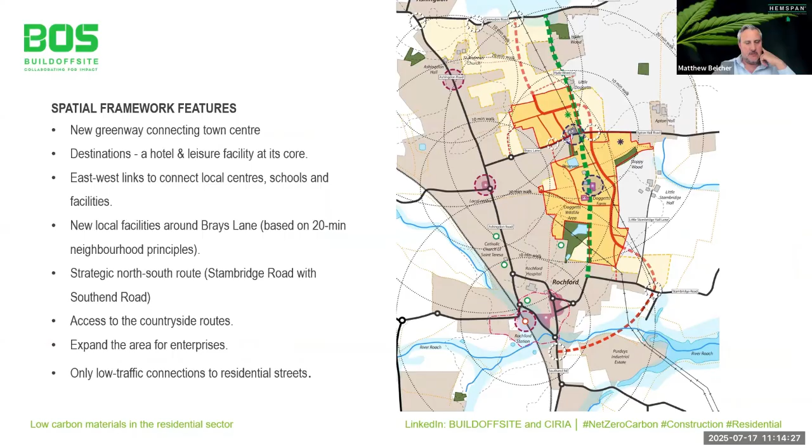You'll see some things hopefully coming out in the industry around this partnership, and also looking at how to provide the local community with ways to minimize the impact of the development.

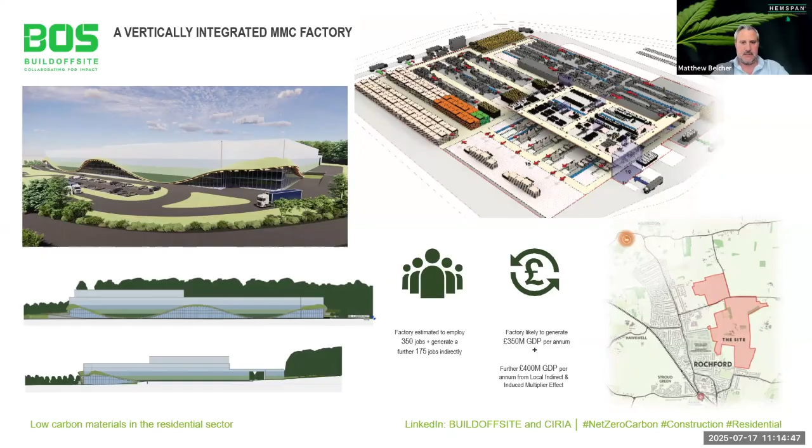And we have detailed designs and business plans for a vertically integrated production facility. That's raw timber and hemp coming in, all the way through processing and manufacture into biohouse panels out the other end. So thanks for listening, and I'll be around at the end to take questions.

Thank you, Matthew. Moving on to our next speaker, we have Rory Bergin, partner at Sustainable Futures, HTA Architects, who will be presenting on designing the world's first volumetric building over 40 stories using low carbon materials. Over to you, Rory.

Thank you, Kat. So my role at HTA is to lead on sustainable design, and also to make sure that as a practice we are keeping up with trends in the industry. In recent years, I would say a lot of these issues that others have mentioned, such as the use of bio-based materials, for example.

It has been challenging, I would say, in the last few years, because what we've seen, coming out of the Building Safety Act and the arrival of the definition of higher risk buildings and so on, is a lot of changes in the sector about what the attitude to risk is. So I suppose as a background to all of this, innovation has become difficult in the sector, but it's interesting to see how other people are dealing with some of those issues in the previous presentations.

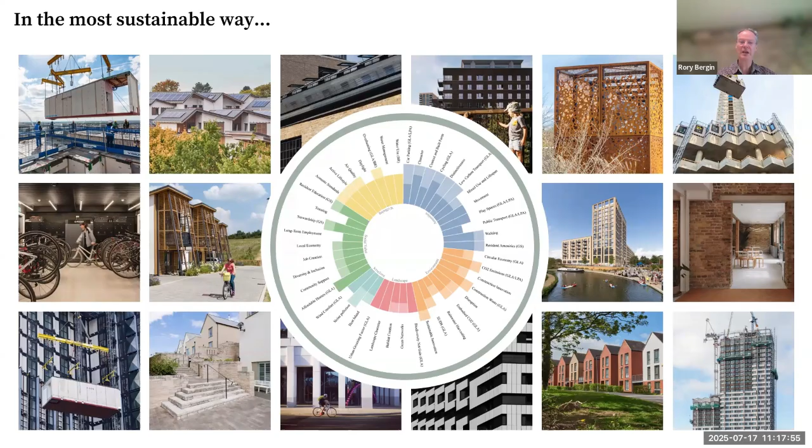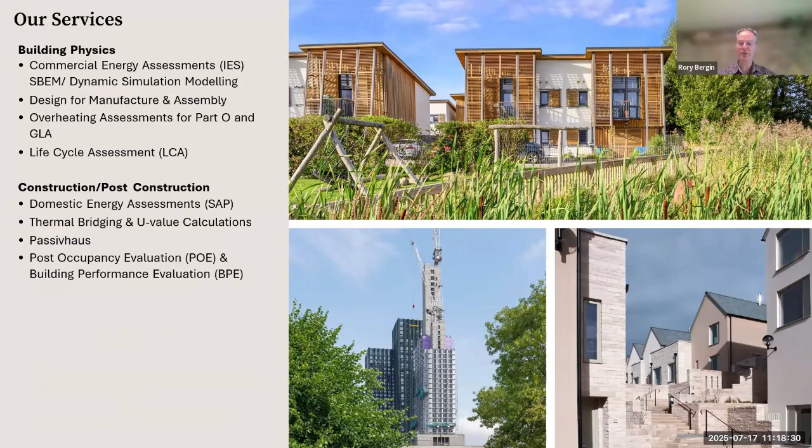It's a very rewarding part of our activity. And of course, trying to be as sustainable as we possibly can in the process, keeping up with current legislation and the availability of materials and different systems. We have a team of specialists who we bring together to offer comprehensive advice across the usual sustainability issues that designers have to deal with in the modern construction sector, in the residential sector, and in London.

So it's not just about some building regulations as the bottom tier, and then it's the GLA, and then it's client requirements and sometimes funding requirements. A really interesting thing we've seen over the last decade or so has been the increase in demands for more sustainable approaches from the funders, sometimes going beyond policy. So that's an interesting development.

One of the areas that this has moved us into is innovative construction, in particular tall modular buildings. We have a large portfolio now of completed projects up to 48 stories of steel framed, self-structured, self-supporting modular structures.

It's interesting at the moment. We're having conversations and actively helping clients in cities internationally at the moment, much more than in the past. Partly because, mainly because of this experience, because what we're seeing around the world is cities, in the same way that London is, cities generally are finding it difficult to keep up with demand.

Successful cities around the world have an issue where they want to build more, usually more housing. They're not able to, for one reason or another. They're not able to build quickly enough. And the result is the market is constrained, homes get more expensive, rental level goes up, young people find it more difficult to rent or live there.

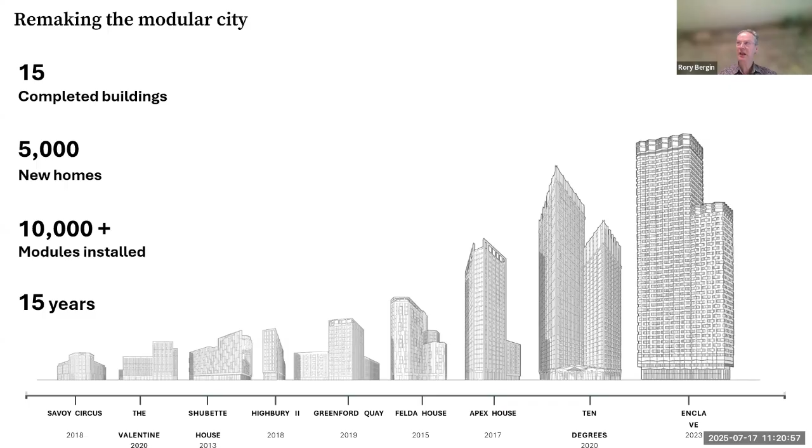It's been interesting to us in the last few years how much interest this idea is getting from other cities around the world. We've built a lot of buildings and are continuing to build a lot of buildings, and generally speaking, they've been built at about 50% of the time of a typical construction project. So if you're building a student building, or a rental apartment building, the sooner you get the buildings completed and ready for occupation, the sooner they can start to pay back loans, pay back finance, etc.

So there's a lot of benefits to clients in going down this approach. But I think the interest worldwide is more about productivity, more about getting things done, and maybe less about the speed of delivery or the finances. Many cities around the world are finding it difficult just to get enough housing built in time.

We take care not to make buildings look as though they were prefabricated. While that's an interesting aesthetic in itself, it's not something we feel you can use again and again. So our buildings tend to be made from modules which are built in a factory, usually in the UK, and then brought to site. The building is erected, and then a cladding system is applied to it.

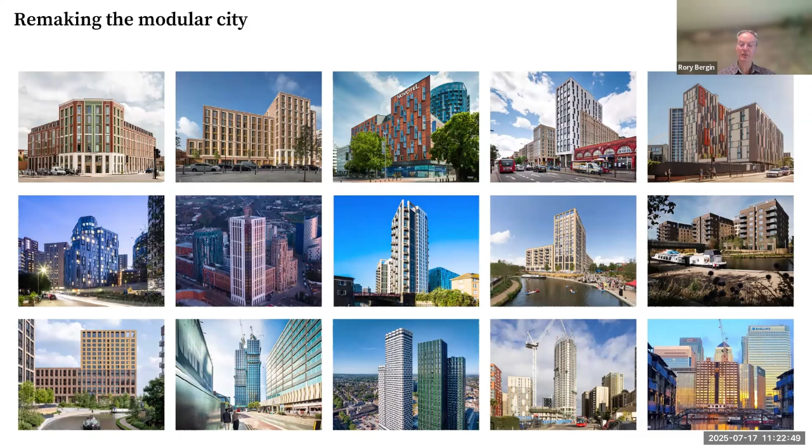That enables us to reflect perhaps local materials, reflect the need to create a design which is attractive, perhaps a landmark in its own particular location. So it enables us to be responsive as designers, and also to create interesting buildings, I guess.

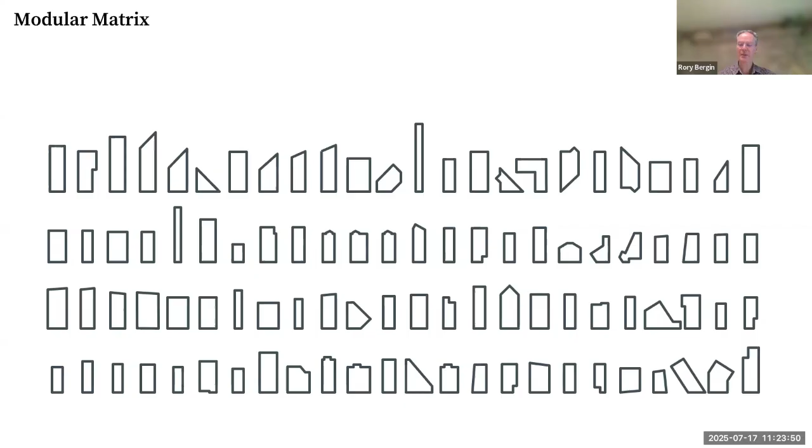Particularly in dense urban environments, it's important that the construction methodology and the approach to designing and manufacturing is flexible enough to make that work. You have the benefit of perhaps a tall building, 20, 30, 40 stories, and you have the repetition vertically, rather than expecting everything to be made the same way.

So, talking about embodied carbon and following on perhaps from some of the things that Steve was saying, we find that because of the lower mass of the steel in construction, these buildings have a concrete core and concrete floors generally, with the concrete floors being built into the modules.

But generally we are at or below the bands required to meet the London plan. The London plan requires 800 kilograms of CO2 per square meter, and the RIBA 2030 band is 625. So we're kind of hovering around there, and with some smaller buildings, we've gone below it.

It's going to be interesting to us to see over the coming years, what the advent of perhaps green steel or the decarbonization of the steel industry, as well as the decarbonization of the concrete industry, what impact that's going to make.

And it's interesting. We sit as both architects and sustainability consultants on our projects. So we as sustainability consultants would push the architects to do X, and the architects and us will push the contractor to do X. But sometimes there are program reasons why that can't happen. So for example, the use of GGBS generally slows down the curing time for concrete, which has an effect on the program. The availability of GGBS is dropping because of the decarbonization of steel.

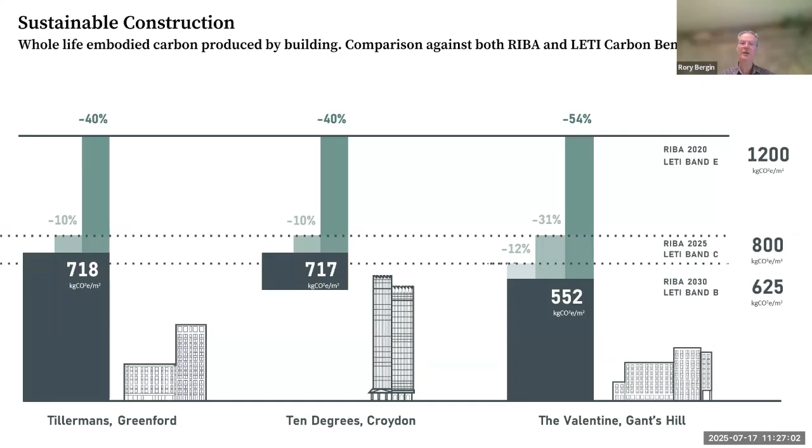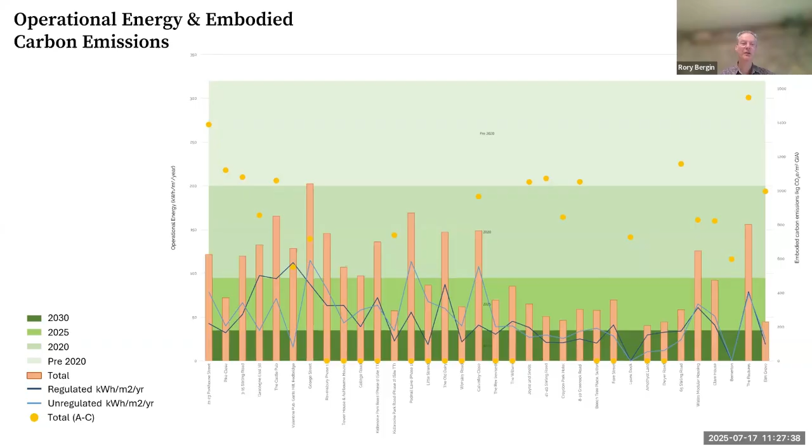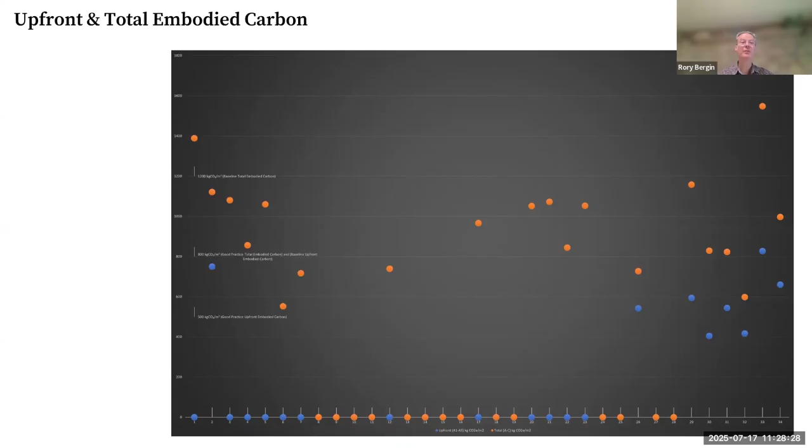This data is collected on our own projects, the projects that we as a practice are involved in from a sustainability point of view. People like Max Fordham and others also do embodied carbon studies of our buildings. So it'd be interesting perhaps for us to collect the data from those and bring them all together. It'd be nice if the GLA produced something on this themselves, given that they have quite a lot of data from all of their projects. And then, as well as all of this sort of...